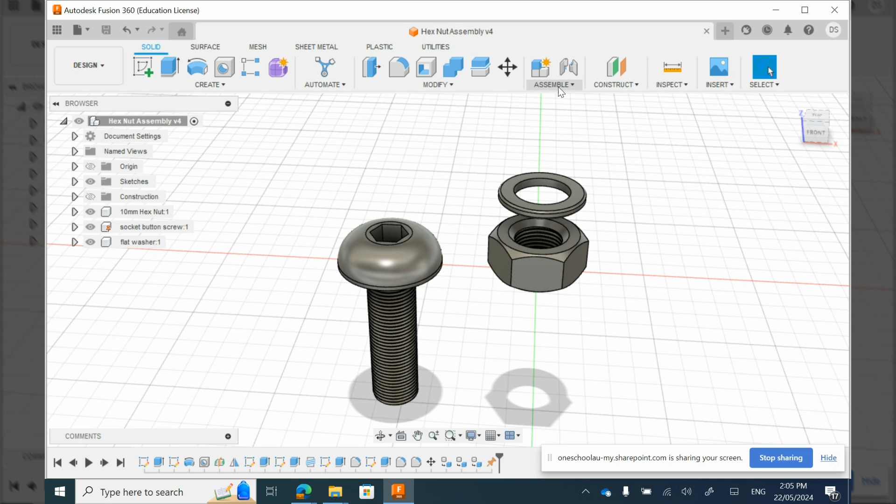So we're going to assemble the washer and then the nut. To assemble the washer, hit assemble, joint, and I'm just going to zoom in on this edge here.

If I try and select the center, it just disappears. So every time I go there, I want to get the center, but when I go, it disappears.

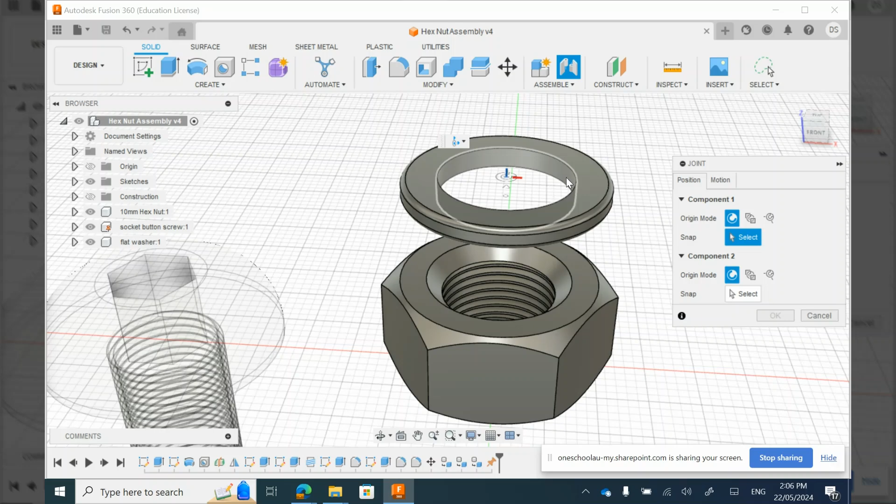So what I'm going to do is hold the control key down when I've got that edge selected. If I hold control, I can go into the middle and select that center point. From there, I'm going to orbit around, so it will be invisible now.

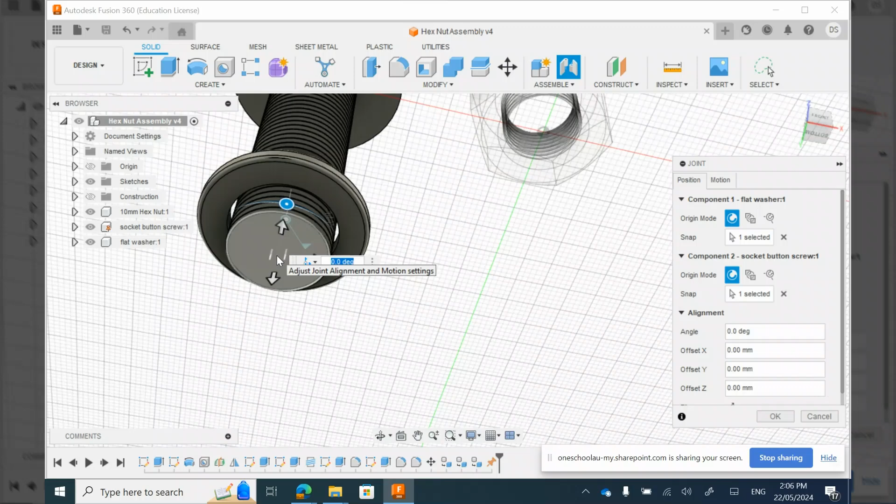We're going to go to the center here, escape to the center here, and that's where we want to snap our edge to. So I'm just going to go to the home view to view that.

You can see we've got a nice even and matched up alignment. So I'm going to leave everything here in terms of the angle and offset.

I'm going to go to the motion and change that to slider. So that's the function I want.

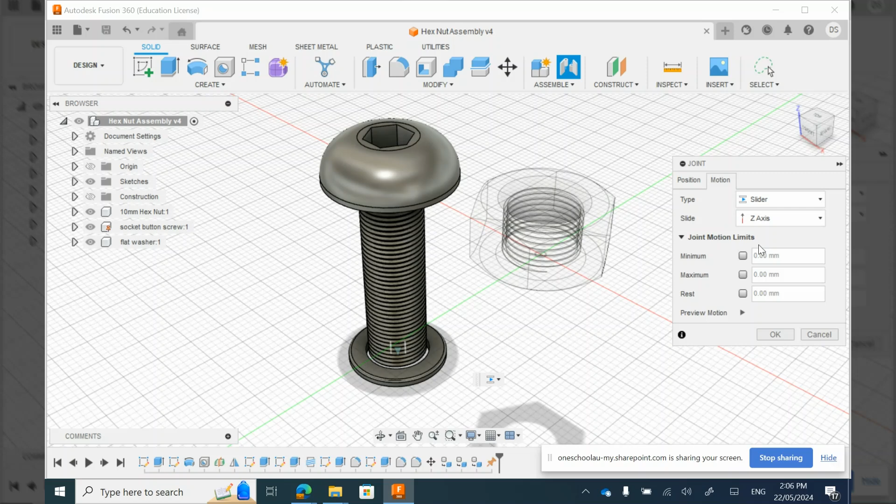And the minimum here, I'm going to put in minus 45, because I'm pretty sure... no, minus 40, because we made our thread 40.

And that one we can leave at 0. Minus 30... it was minus 40.

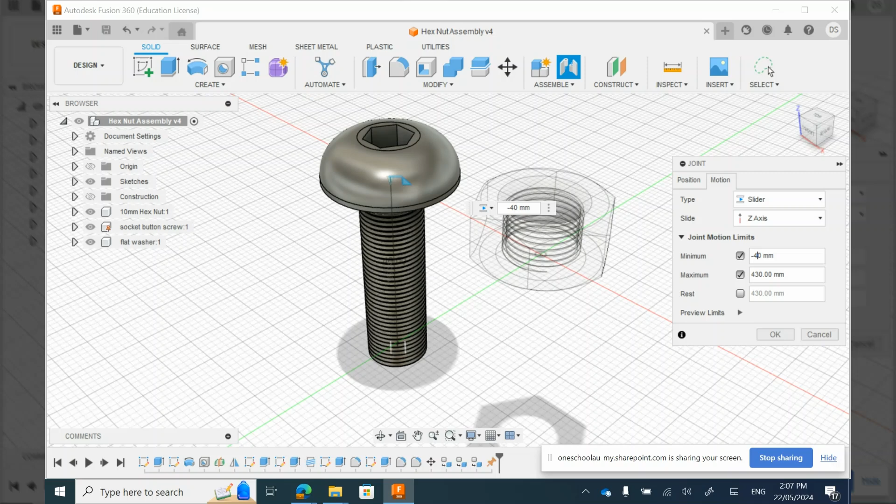Okay, so I think it was just hidden there. So I'm just going to go to my front view.

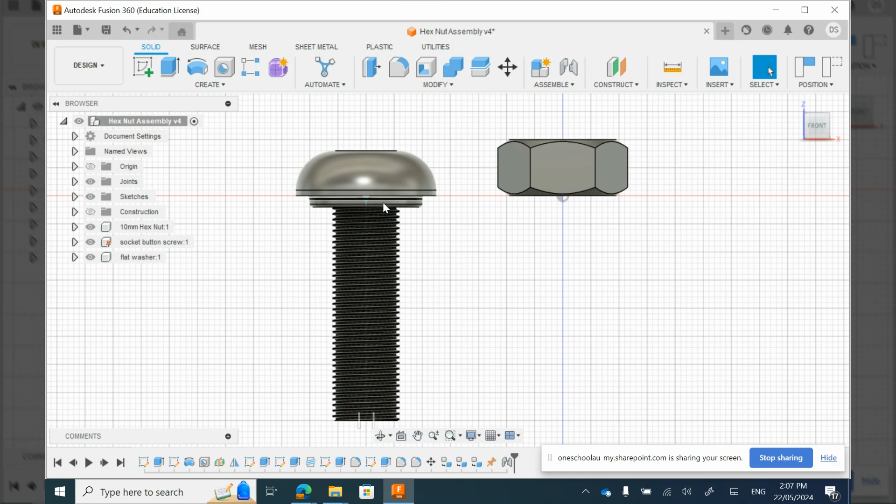And I should be able to slide that up all the way, and that comes flush with my socket button screw head. So there we go. Just couldn't see it on the angle.

So the next one, we're going to repeat that for the hex nut. So assemble, joint, and we're going to select that edge again. Hold the control down, select the center.

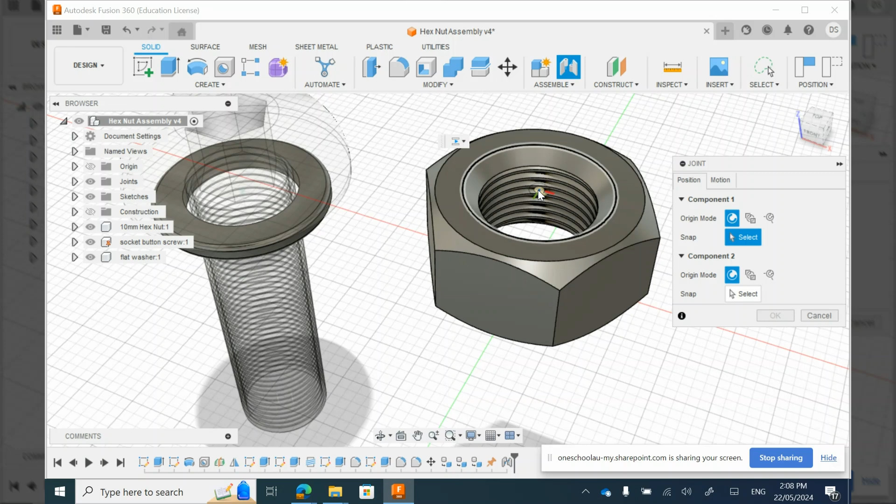And then go back down and select the center, and that should be where I want it to be.

So I'm going to go back to the home view again so I can see what's going on. Actually, I'll go to the front view so I can see what's happening there.

I'm going to leave my position as is, and there's a motion here. We're going to change that to cylindrical. So that's, if you can see here, rotates around, and we're not going to set any limitations on that because it will rotate more than 360.

And then we've got also the vertical slide as well. So we've got rotation around and vertical slide.

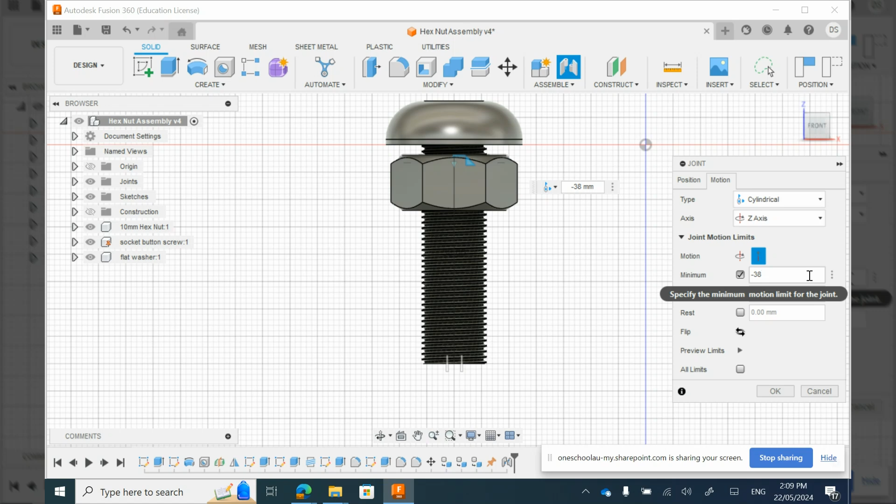This one we're going to change, because I know my washer's 2 mil thick, I'm going to change that to minus 38, and that should become flush with the washer. And I might change the bottom one to 5 mil off.

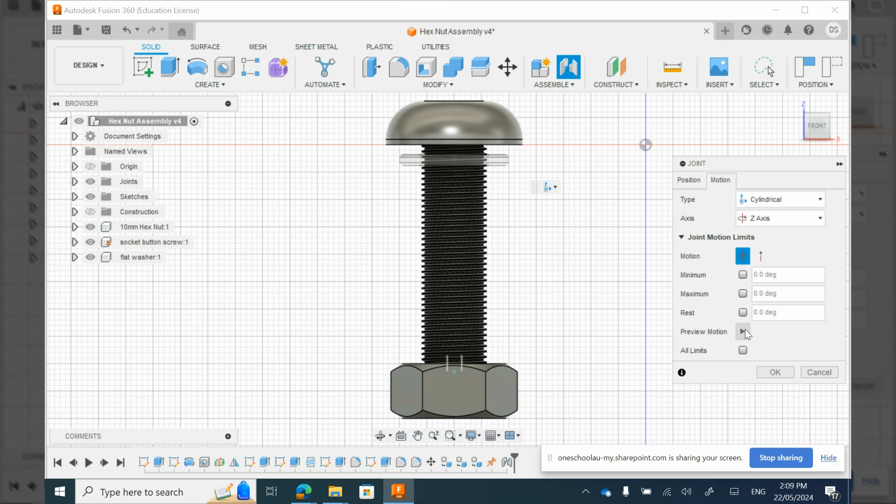Okay, so you can preview that. And you can also preview the rotation. All right, that looks good. I'm going to select OK.

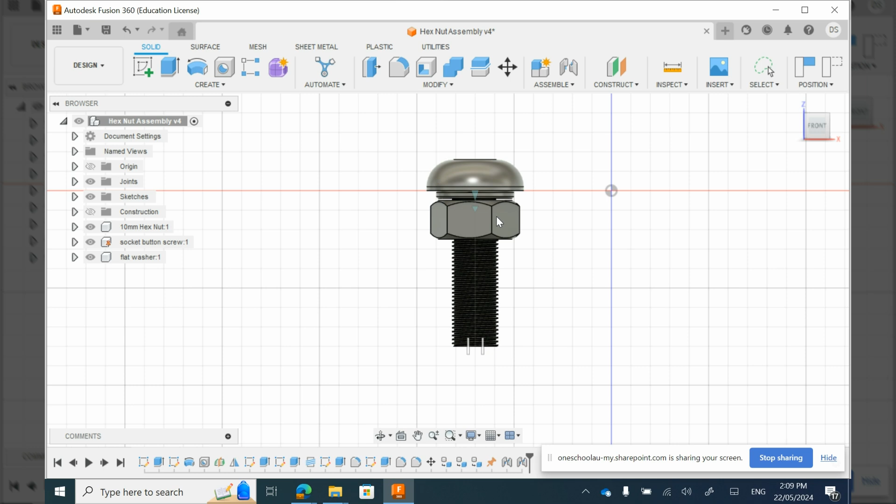So now I've got my feature. I can move it up and down to its limitations. So this one goes here, and my limitation is to the washer. Now, if we can see that, the one little thing is it's not acting as if it were spiraling around the thread.

So the last step I'm going to do, I'm just going to select this here, now my hex nut. I'm going back to assemble, and we're going to insert a motion link.

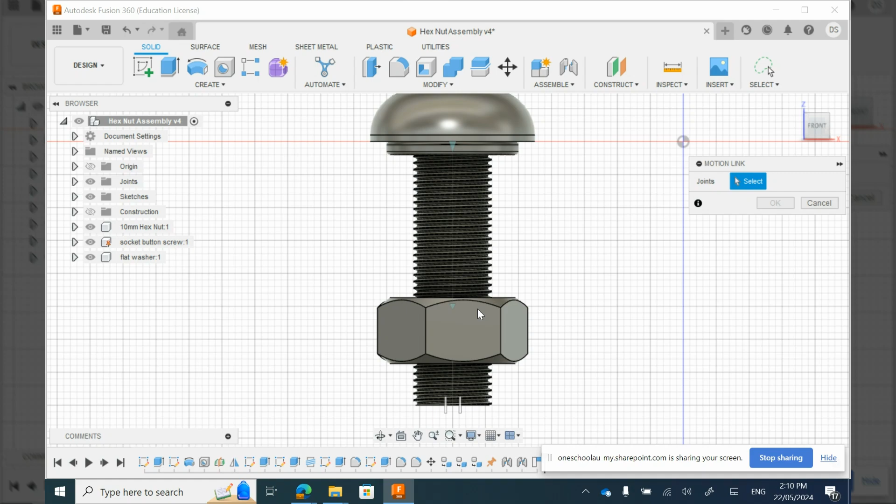I'm just going to capture the position, and if we change the angle a little bit, we can sort of see our motion link there—one that goes around, we can see the arrow going around, and one that goes up and down. So we're going to select that link, and we're going to link with same joint.

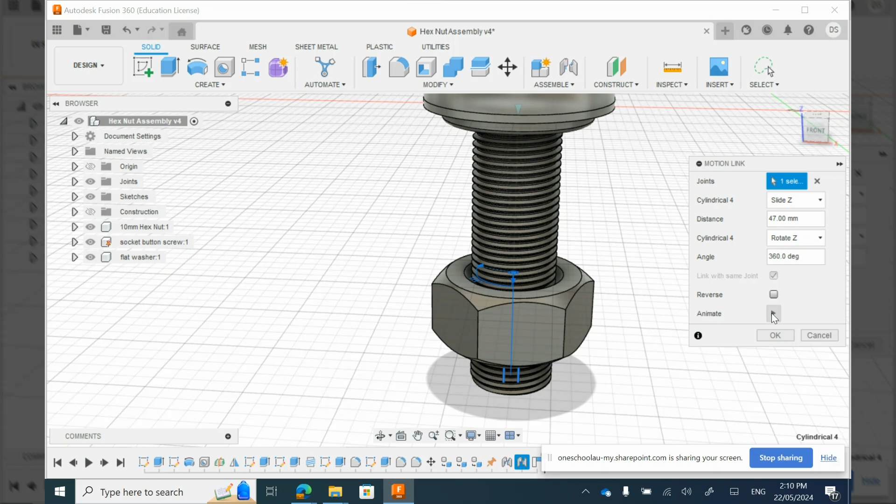And that should then give us a demonstration. We'll animate that, and I'm happy with that, so okay.

So now if I were to view this, just by selecting the edge here of my hex nut, when I go up and down, I'll just drag that round as if it were actually rotating. So that is joining our components.

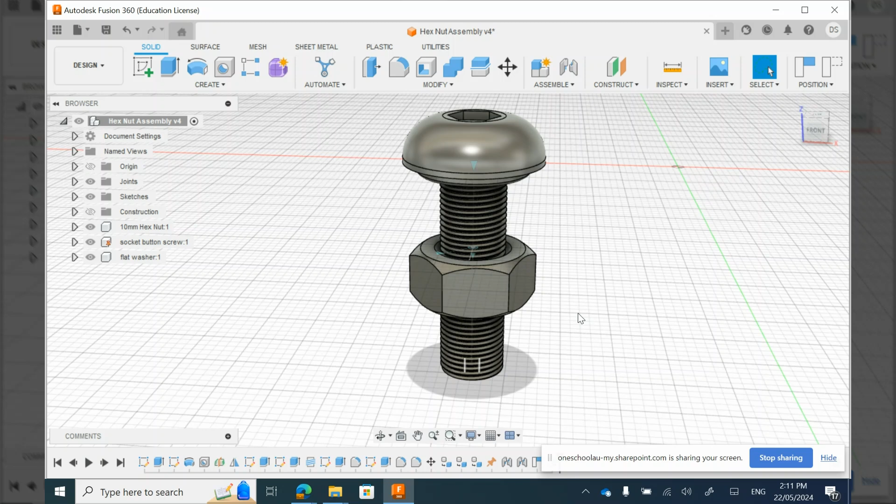The next elements will be creating renders, an exploded or assembly view, dimensioning components, and section view.